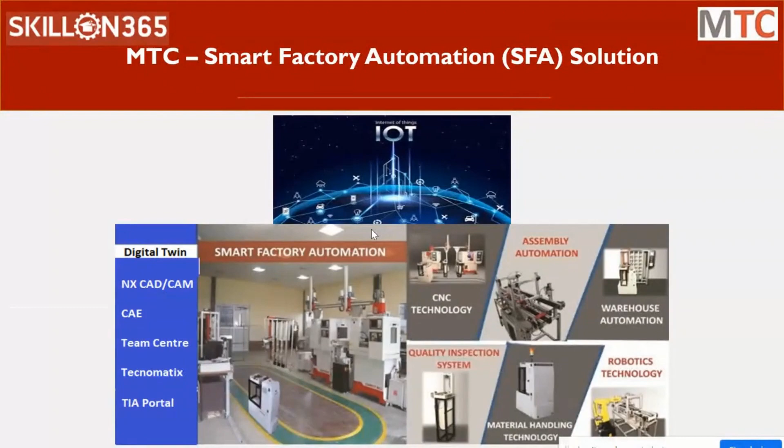I'll start with a video of a basic understanding on this smart factory. As I was explaining, this is an automated factory where a particular engineer sits at a computer, programs it completely in software, and that is done automatically.

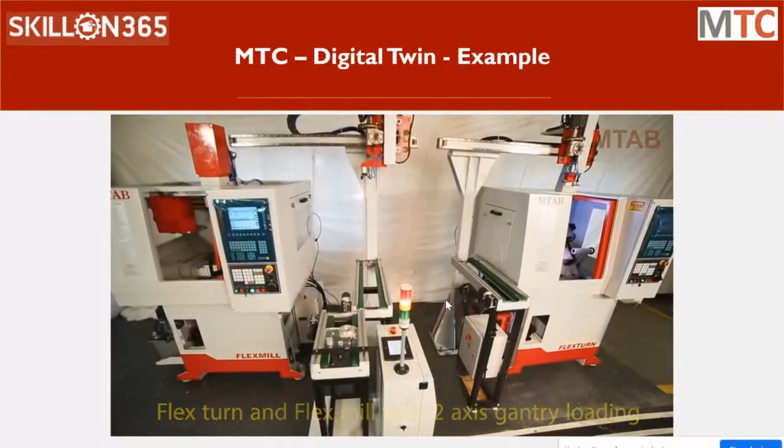When I say programming, he defines the infrastructure of the factory - what components and equipment are available, what the individual processes are, and what the sequence of operations is. Once he defines all that, the complete operation is done automatically in a sequential manner.

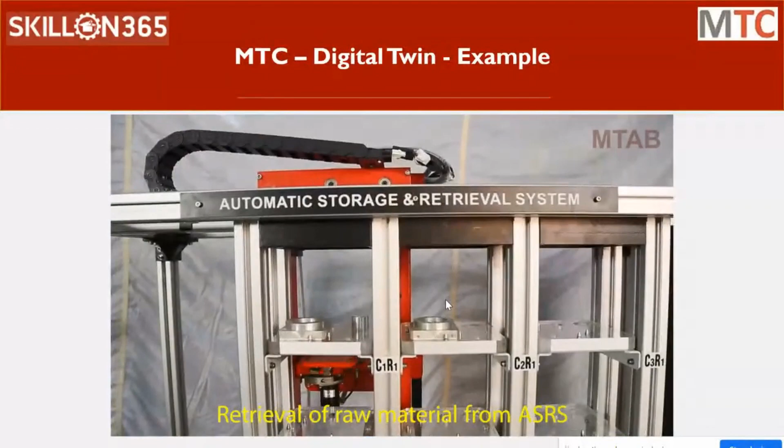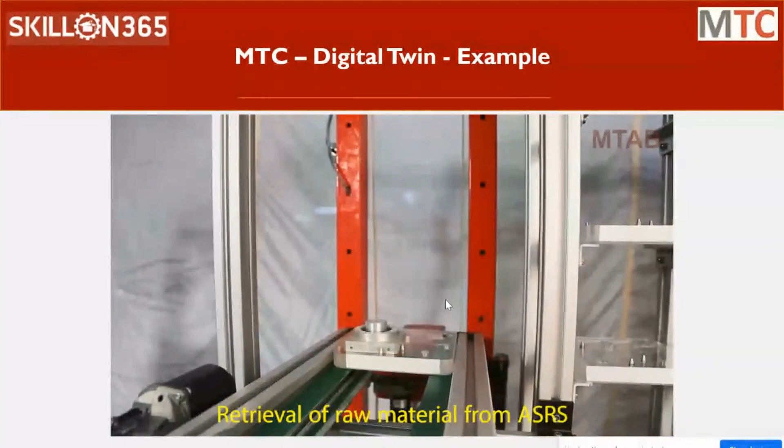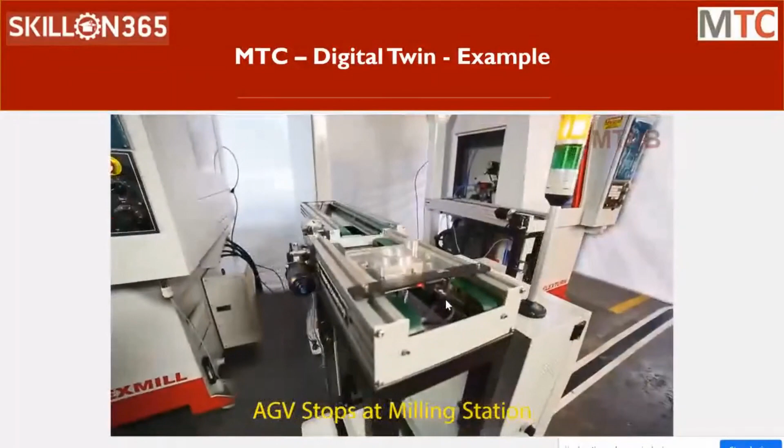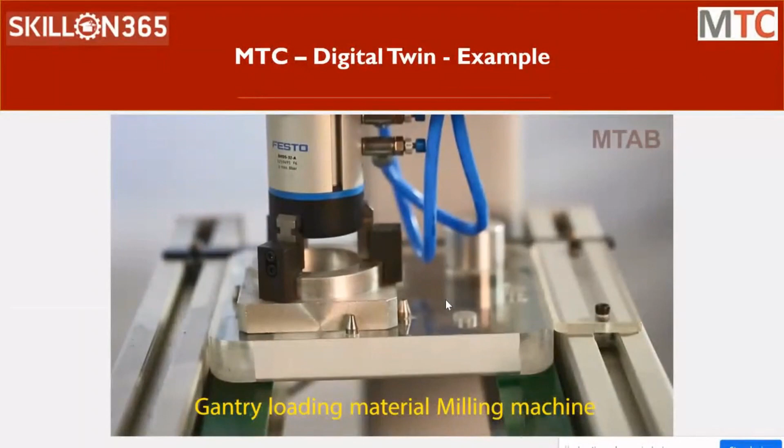Let's take a typical manufacturing sector. The basic infrastructure available includes a storage space where raw material or finished goods are stored - the stores. Then there's a manufacturing space where machining or production of components happens. Then there's an assembly area where things get assembled - the product from the production line gets assembled. Then there's a quality test area where products are tested, and finally it gets stored. This is the normal process and infrastructure involved in a manufacturing industry.

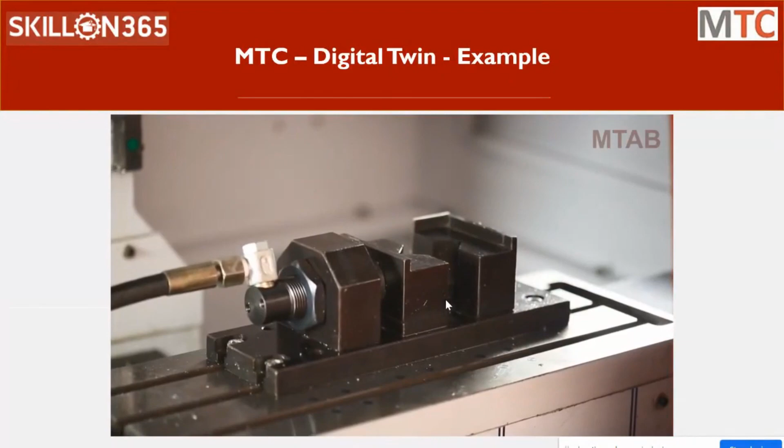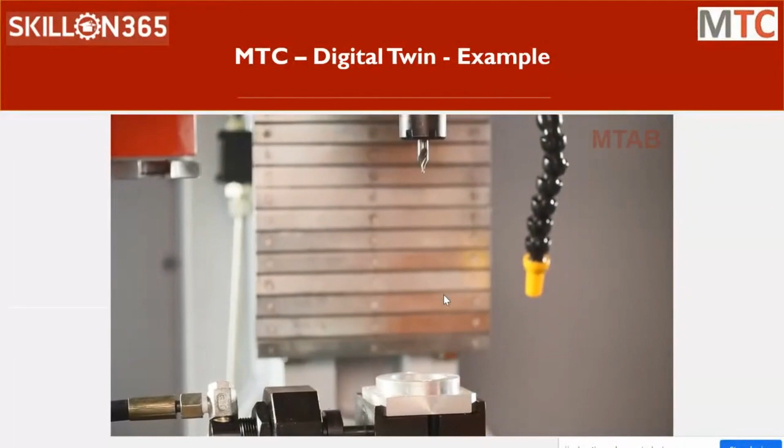So here we have a similar model. We have an automatic storage and retrieval system, where raw materials or finished goods are stored - it is an automatic warehousing, and we can program it to store the raw materials accordingly. There is an automated guided vehicle which transports the material to individual stations, so transportation and logistics are automated here.

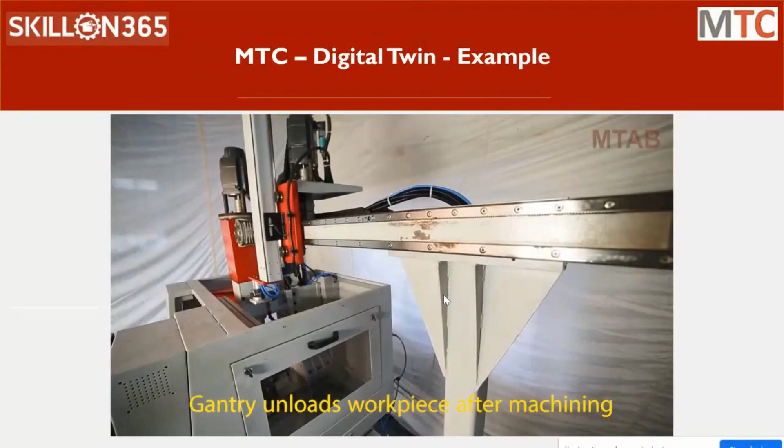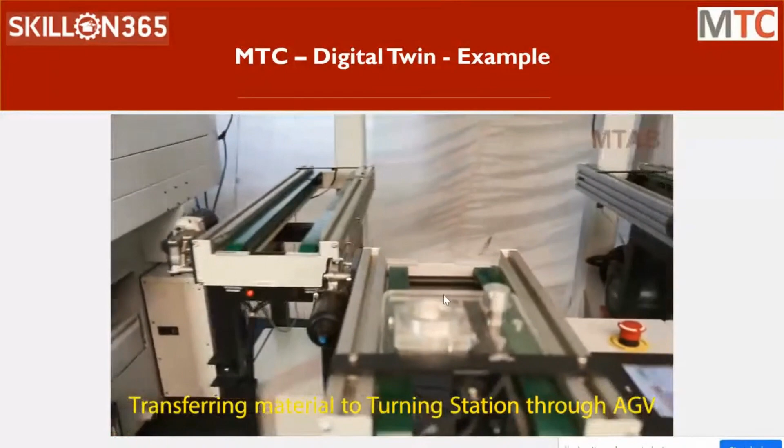In the production line we have CNC machines - a lathe and a VMC, used to manufacture the components. Here we are trying to simulate an example of a bearing and shaft assembly. There is a shaft which gets machined in the VMC, and a lock which gets machined in the lathe machine, and the bearing gets assembled on the shaft and gets locked. This is the process you're seeing in this video.

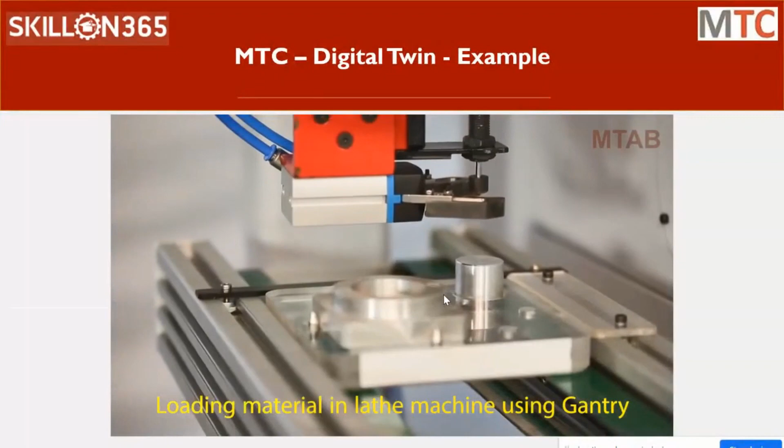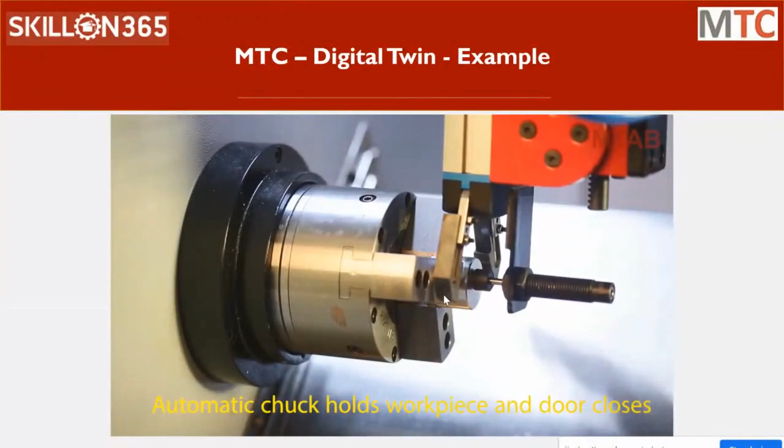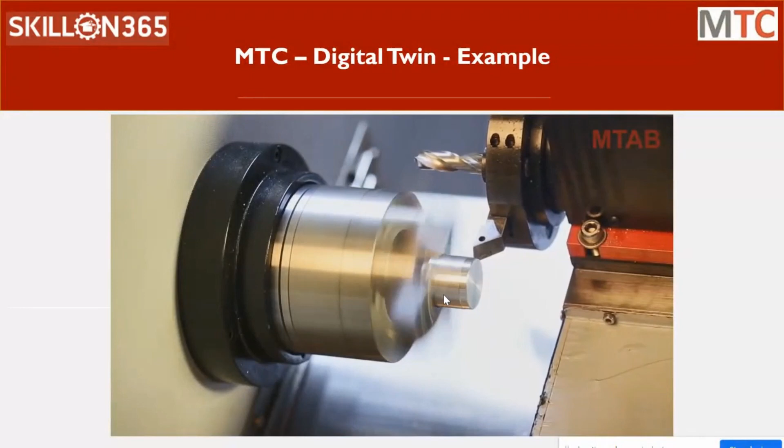First the job gets machined in the VMC, then the lock in the lathe machine. As explained, this is a completely automated setup - this production line is automated for loading and unloading using a gantry robot. The job is automatically picked up from the belt conveyor, loaded into the CNC machine, and machining starts automatically. Once machining is done, it picks up the job from the chuck and places it back into the conveyor.

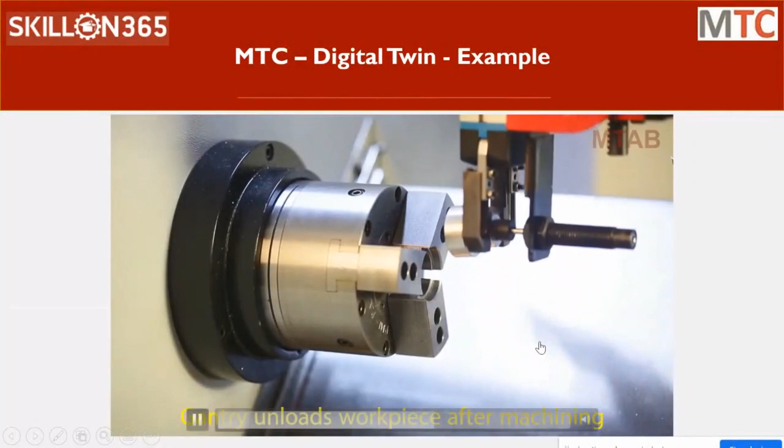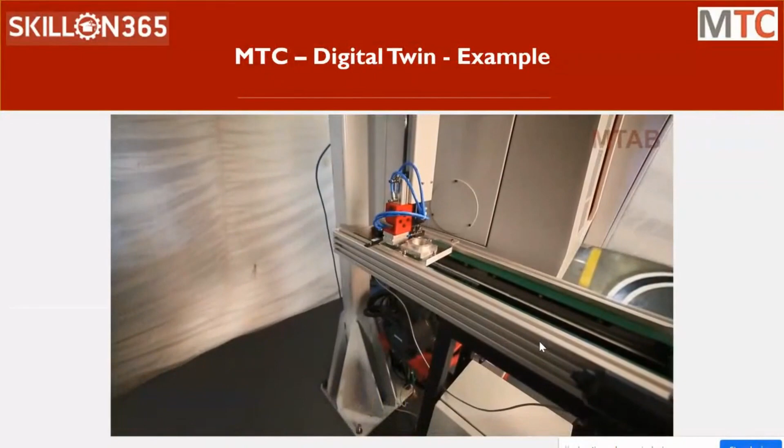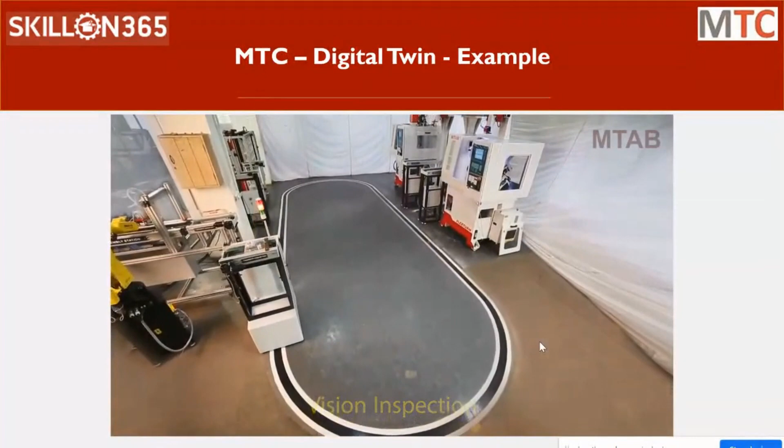So now the production is done. Then it goes to the next station, which is the assembly station, again using the automated guided vehicle. So whatever components are machined right now, the shaft and the lock, get assembled with the bearing to complete the product.

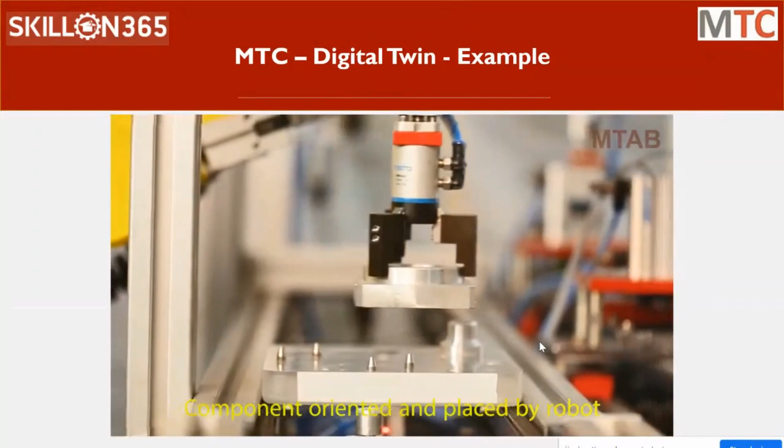This is a mechatronic based assembly station with robots, made more modular. The first step is the assembly of the bearing. You could see that in the video. Bearing got assembled.

Now the lock will get assembled.

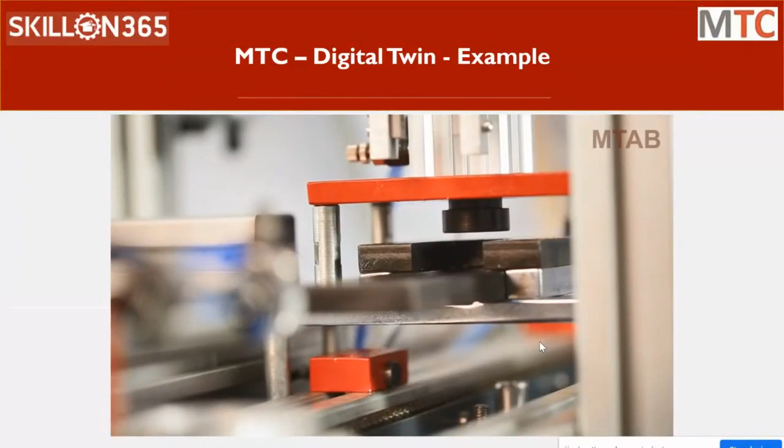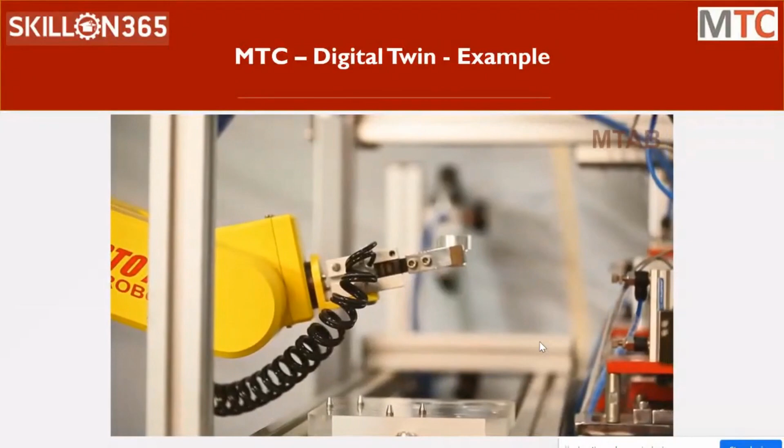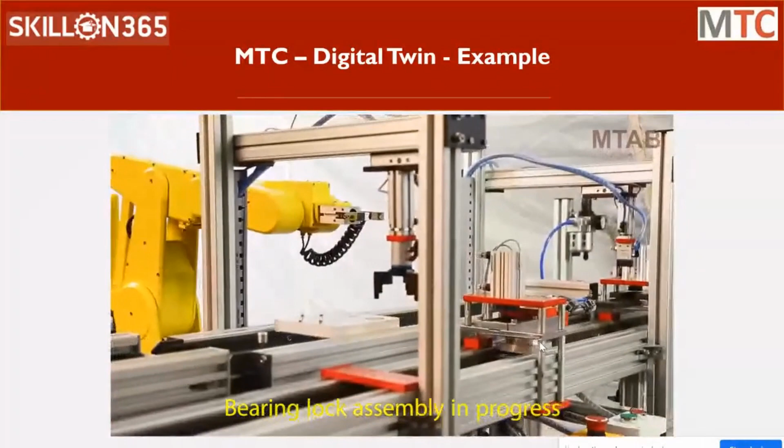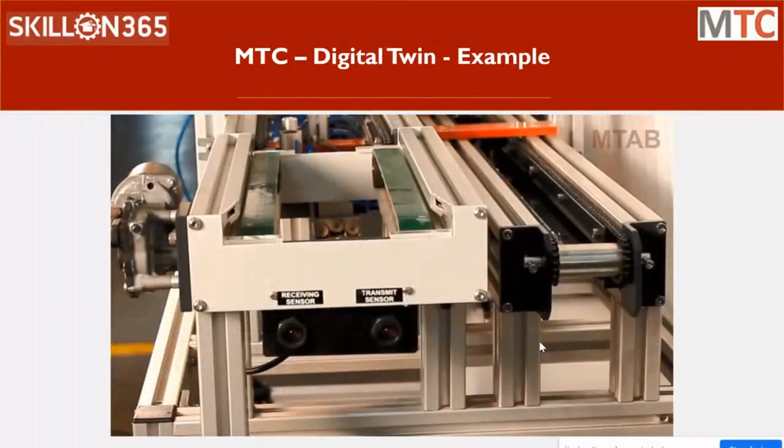In a typical manufacturing industry, as I was explaining earlier, the supervisor or manager defines the infrastructure, defines the process of individual stations, and defines the sequence of flow of information to automate the process, or even if manual, how it goes through each station and how the assembly is completely done. Right now you could see the product is completely assembled and then it goes to the next station. So the process they write covers everything from picking up raw material till quality testing is done, and then placing it back into storage. That is the complete work a manager does.

Similarly, they are going to do that in the software in an automated way.

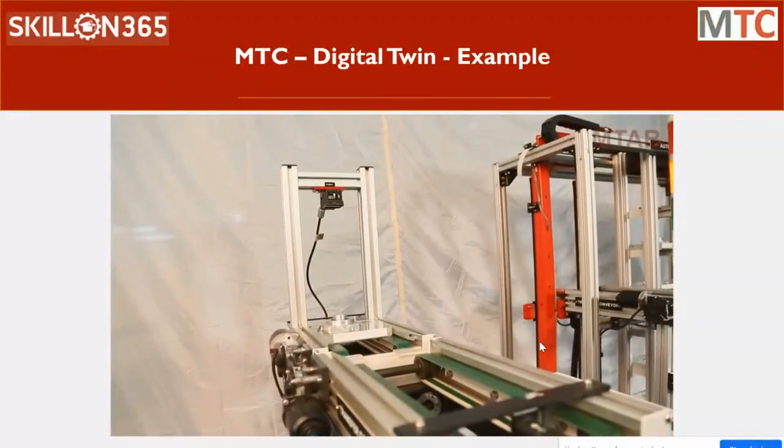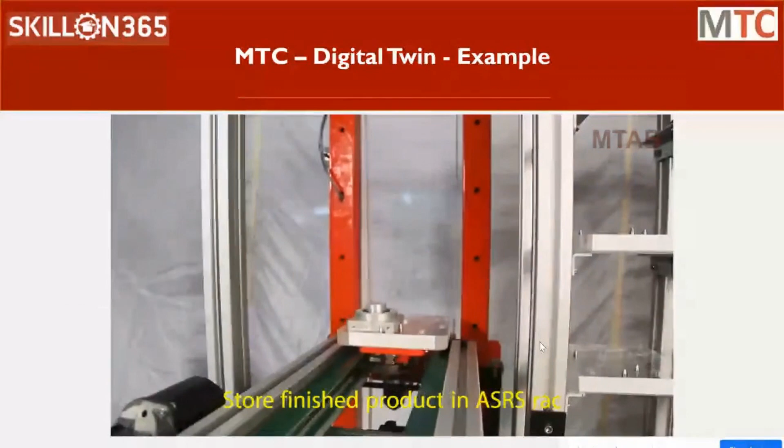This is a vision inspection station using image processing technology with a vision camera. We examine the job which is assembled, and using stored parameters, it gives a result on whether it is accepted or rejected, and the job is stored accordingly. We can program it so that if rejected, it goes for remachining or rework, or to the rejected bin, however we want.

So this is a typical example of a manufacturing industry. It will vary if it's a process industry, where the process would be different, maybe without any CNC machine, with other processing work done according to the job or product. So this is the complete automated factory, and on top of this is where digitalization sits in. We're going to see digitalization in a later part.

In the smart factory, I'd like to cover some information I faced earlier. I've been conducting this webinar for quite some time with many institutes, and I get questions from students and faculty about whether automation is going to completely eradicate humans or take away their jobs, or what automation's actual role is in industry.

We're talking about a nuclear industry where a lot of nuclear-related jobs are done, with restricted usage of humans or limited ways of working in those environments. Take chemical industries, or glass or rubber industries, where the process has to be very strict and tidy so they don't face accidents that could cause injuries. You would have heard some recent news in Visakhapatnam as well, right? So those things can be avoided.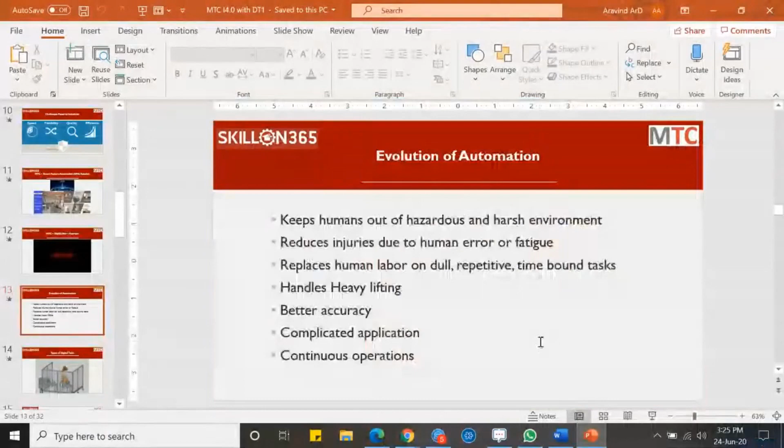I'd like to show you an example using my product. This is our online e-learning product, SkillOn365, where industry cases or industry skills we've gained as knowledge have been made into content online for learning. We have one course on robotics basics that tells you the different applications of robotics industry is looking at today. These are broad areas, and according to our intelligence and ideas we can explore much more opportunities available.

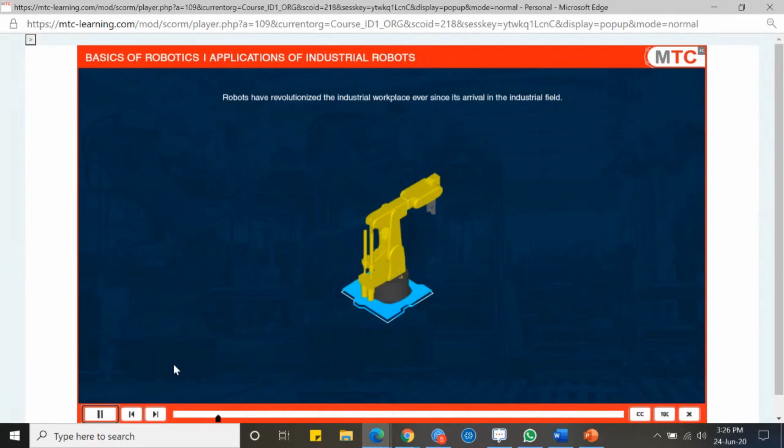Robots have revolutionized the industrial workplace ever since its arrival in the industrial field. According to ABB Robotics Analysis of Statistics from the International Federation of Robotics, most robots do very specific tasks and fall into 10 categories. They are arc welding or robot welding that joins metal surfaces.

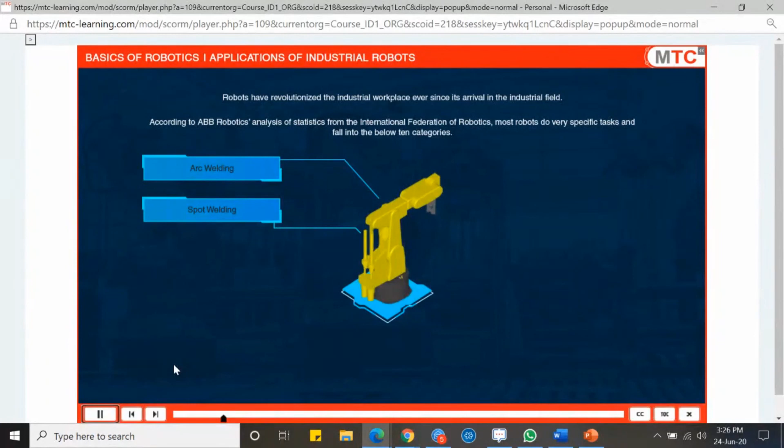This improves the safety of workers by avoiding arc burn and inhaling hazardous fumes. Spot welding, where two contacting metal surfaces are joined by directing a large current through a spot of an automotive piece. Materials handling, where robots are utilized to move, pack, and select products. Machine tending, used for loading and unloading raw materials into machinery for processing.

Robots are used to paint automotive body parts. Robotic picking and packaging, which increases speed and accuracy.

Hello, Mr. Arvind. Please be louder. The audio is not clear. Yes, madam.

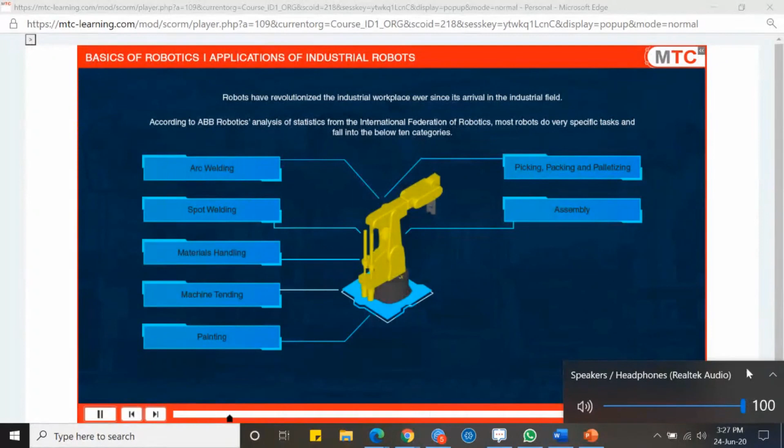Robots are also used in the finishing process after processing machinery, such as mechanical cutting, grinding, deburring, and polishing. They're also used in glue, adhesive sealing, and spraying materials, such as windscreen and door sealing assembly. Other processes where robots are used include inspection, water jet cutting, and soldering.

Click or press each tab. These are some of the broad areas of robotics applications that it has evolved into. But as I mentioned, under these there are a lot of other application categories that might come out - it depends on our innovativeness.

For example, a few days back I saw a video from some European countries where robotics is used in agriculture for plucking fruits. What they did is fit a vision inspection camera in the robot as an end effector along with a gripper. The vision inspection checks whether the fruit is ripened or not, and then the gripper picks the fruit. The kind of work being done today is massive.

Similarly, in the welding sector, we recently worked out a solution for arc welding. One customer does a lot of welding work for building body parts for trucks or buses. If you buy a truck from Tata or Ashok Leyland, you get only the chassis, and then the body or cabinet is built separately by other companies. They do this work but aren't getting manual welders, so they wanted automatic robotic welding. We did a complete case study and gave them a solution called laser seam tracking welding.

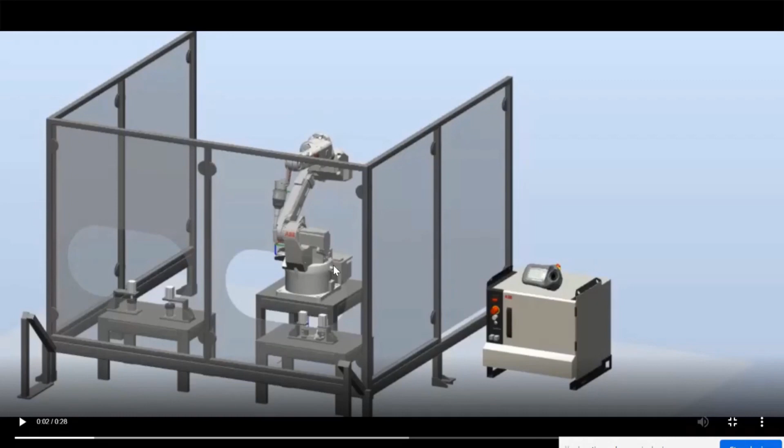Say for example, this is a robotic cell. This is an arc welding cell. You could see the video first, what it is doing. When I press start, the robot moves to the job. It does the welding automatically. The welding is started, it is continuous, and the robot is also moving continuously on the job.

So there is a simultaneous function happening over here, and once it is done, it retracts to its home position. Here, the robot is a separate device and the weld gun is a separate device. They are just interfaced, because when you order a robot, it doesn't come along with the gun. It is always the end effector — this is the end effector, the gun we see here.

Like this, we can put in different types of end effectors — it could be drilling, painting, a spray gun for painting. We can put whichever is required for our application. So here it has to sync with the robot. The third party equipment, whatever we fit in, has to sync with that equipment.

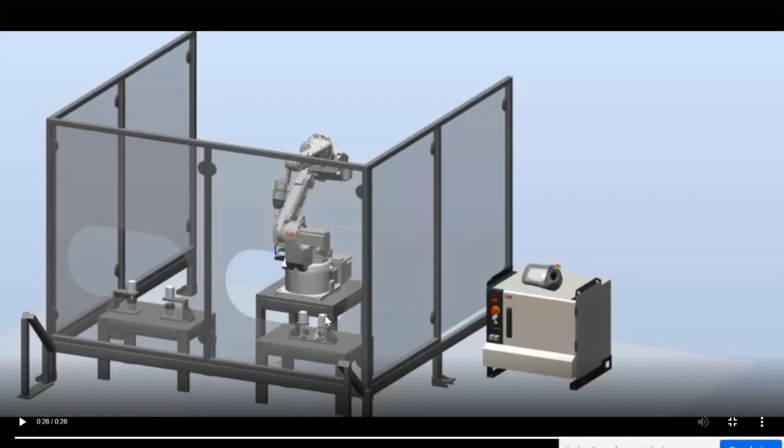There are a lot of fixtures available here where the jobs are clamped, where the welding has to be done. So why we are urging that you learn the technology via the application is that you could see the way the course is built — that will give you the idea why.

First is to understand what is this workstation, this work environment. The robot has to understand what are the things surrounding it — like there is a gun, a fixture, a cell, sensors. And it is an automated one, so they have to talk to each other and perform this job in a very sequential way without any accident. So first we have to understand the entire work cell.

Then we have to do the interfacing. The second is about configuring the controller. As I mentioned, the third party equipment which you fit has to communicate with the robot, and they both have to work in synergy, in sync. Only then is the job outcome produced. If not, the outcome is not there.

Then I might be doing it again manually — I might have multiple buttons, press one button for the robot to move to one position, press another button to start the welding. So the idea of automation is totally diluted there, and that doesn't work. So the second step is configuring the control systems.

The third is about creating the tool center point. Let's see what that is — I just want to get into that chapter a little deeper so you understand what we are talking about, because only then does the programming come in. Programming is only a part of the application. First we have to understand, because when we write the program, we will be calling the welding gun to come and do the welding.

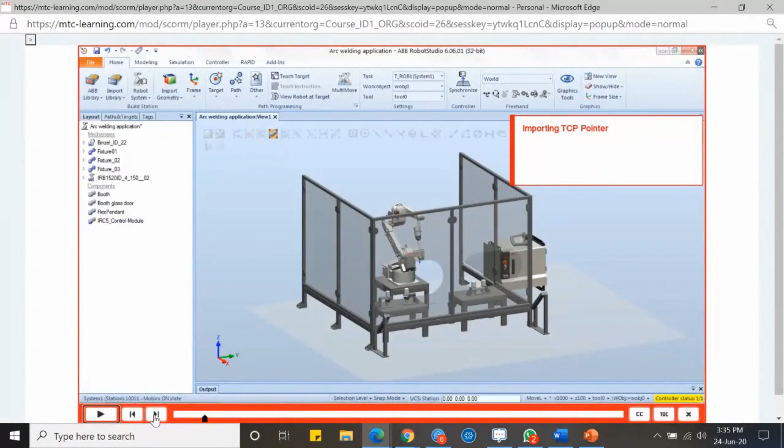So let's now learn how to import a TCP pointer. This course will teach you how to set the TCP pointer for this robot. By default, the TCP pointer of a robot will be at the center of the robot.

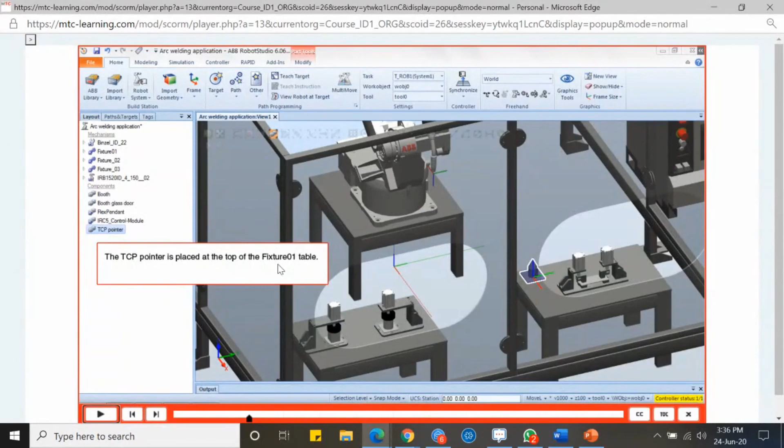Then we have to position it on the fixture table. For that, we have to enter the coordinates and then place it on the set fixture table, the TCP. Then we have to match the tool end tip with the TCP tip, and enter the values as a tool center point for the robot. Then the robot will understand where the job is and where we have to machine it.

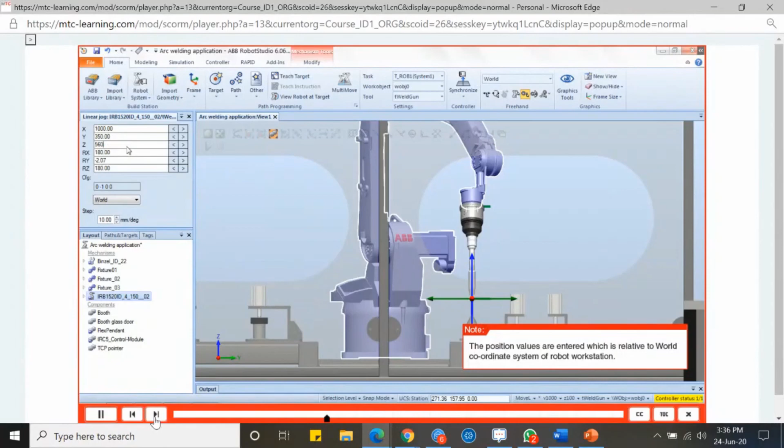Then we have to move the robot, jog the robot, and place it on the right tip, click of the gun, enter and type the value. Double click in the Z coordinate field. Type the value 560 mm and press enter on your keyboard. Note that the position values entered are relative to the world coordinate system of the robot workstation. Close the page and zoom in to view the robot TCP closely.

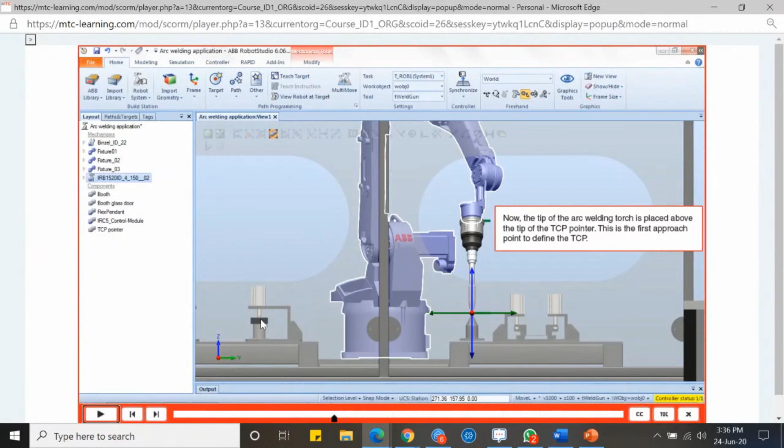Now the tip of the arc welding torch is placed above the tip of the TCP pointer. This is the first approach point to define the TCP. Then, if you want to do the welding in this fixture, we have to set it separately over here. Then the welding has to be started. Then you write the program, and when you write the program in the robotic controller, it will understand where the job has to be done and what welding has to be done.

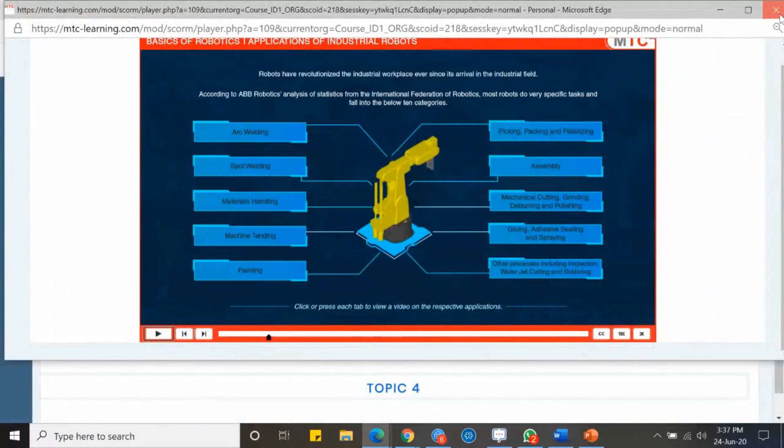So the idea behind teaching robotics or any automation in the application way, I hope you've got this point now. Once I'm done with this course, I'll know how to do this for different applications, like painting, drilling, boring, whatever we just saw. Similarly, I myself in my company, and a few other people in my company, give a lot of automation consultancy to various industries today. They give automation solutions to them. That's how we learn the application, because we need to know various ideas and technologies, then how the robot can be interfaced with that, and give an overall solution to the customer.

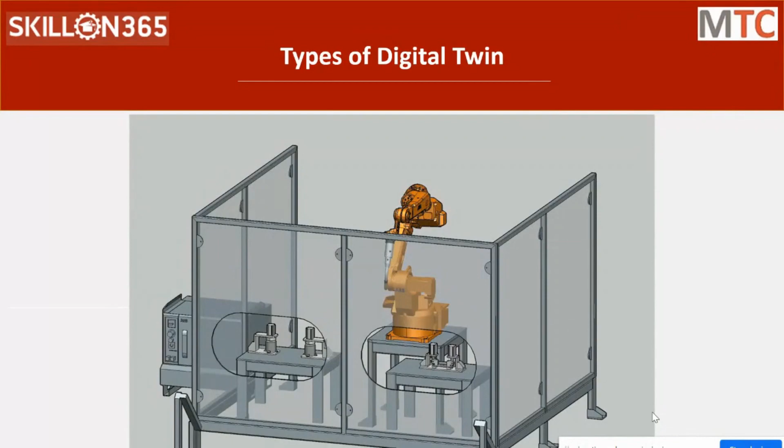So till now, what we saw is the smart factory part. We saw the automated factory, robotics, how it influences, and all those things. Now, on top of it, as I mentioned earlier, the digital twin or digitalization sits. So we're going to see what this digital twin or digitalization that we are talking about is.

So digital twin is actually a virtual representation of, it could be a physical product or it could be a process. I'm representing that into a virtual environment to understand its behavior, predict its behavior, functionality, characteristics, and all those things. And if I have to change a few things to get an optimized outcome, I can do all those in the virtual environment. That is called digital twin.

Let's take an example, a case study, to get more clarity on this. I work for this under my digital factory product line. We got a call from one of the industries in Noida who manufactures a lot of automatic warehousing systems for e-commerce websites like Flipkart, Amazon, Tata Cliq, and all.

So they set up the automated warehousing system. You would have seen this kind of videos on Discovery, and even on YouTube you can see how an Amazon warehousing factory is automated. So they manufacture a similar such setup.

So they got an order from one of these companies, and their delivery time is actually 12 to 15 months. See, these are not standard products that they can manufacture and keep ready to deliver immediately as and when they get the order. No, because these are unique. The customer will define what is the size of the warehouse, what is the size of the pallet, what is the size of the individual pallet holder where they have to keep the job. Accordingly, the warehouse has to be built.

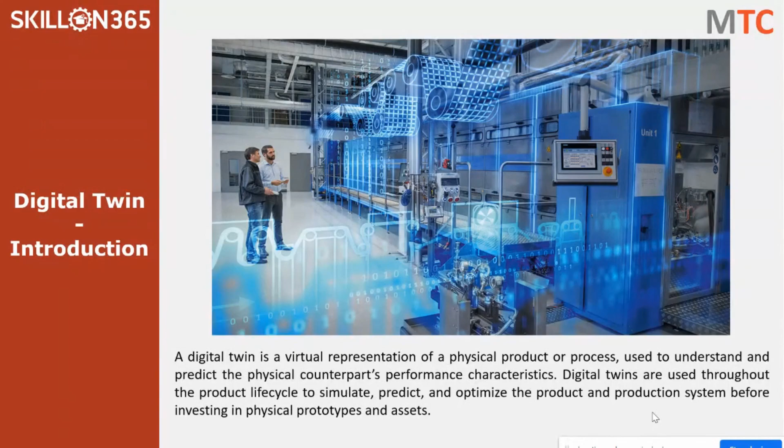What is a digital twin? When we do the design - digital twin has got two parts. One is the design part. Once you do all the CAD layout and all the CAD designs, we apply kinematics to it. Whatever physical properties you mention, like the dimension, the weight, the type of material - all those things - and then we apply the kinematics.

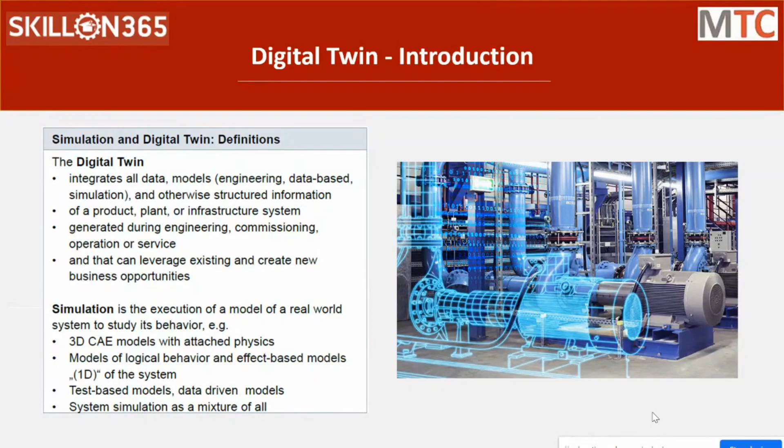Kinematics means if there is movement - if it is moving, whether it's a rotary movement or linear movement, how is it functioning. So those kinematics are also applied, and it is completely tested in the virtual environment before even getting into manufacturing. I test its behavior in the software itself, apply all those conditions - environmental, type, process conditions - everything, and see how it's behaving. In our terms, we call it virtual commissioning.

Once I complete the CAD layout, I import it into an environment where I assemble it virtually. And if there is a fit issue, or an assembly issue where the dimension has to be changed, I can simply change it in the software - it's only a soft virtual one. I can immediately go change the design and again see if it is fitting properly, and whether I can screw it properly, all those things.

Then I can connect it to the controller. I'm already applying the kinematics there. Then now I can connect to a controller - it could be a PLC, an HMI, a SCADA, a CNC, or a VFD, whatever it is.

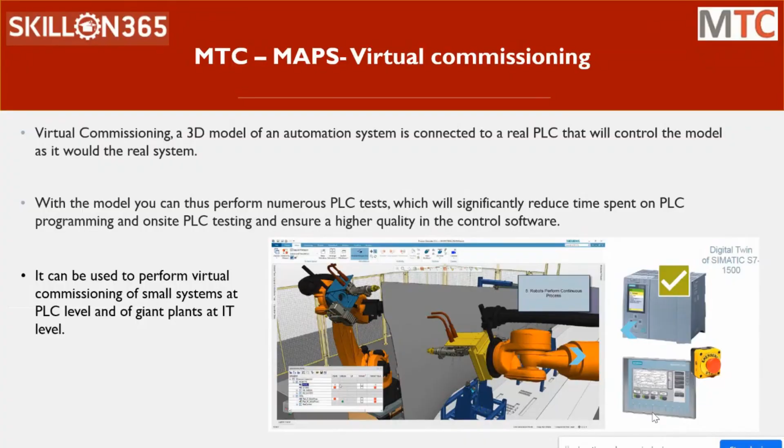And then I give an input from there, and I see how it is reacting and behaving. And if there is any problem, then we can rectify the issues there, and then we are making the product more optimized before even getting into production or implementation of it. So let's take a simple example.

We do a lot of testing in our product as well. This is testing our ASRS, or automatic storage and retrieval system. So this is one kind of testing that we do. This is the ASRS pallet testing. This is an ASRS where this is a pallet conveyor, and these are the number of pallets. We have 18 pallets in there.

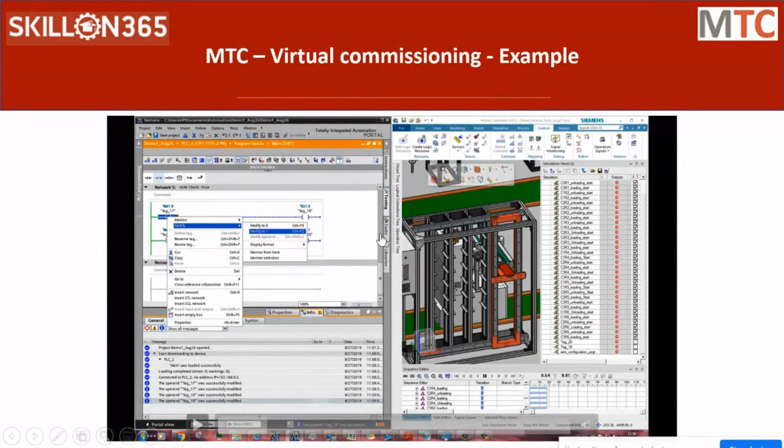We are just trying to test whether it is moving to the right pallet when I program it, because this is connected to the PLC. The input is from a PLC. This is controlled by a PLC. Sometimes errors could happen or an accident could happen even when a program is wrong. So we can also validate our PLC program, whether we have the right program or not. So what we did, we input all the parameters here, the position of every pallet, tag that with the PLC, and give the input from the PLC and see if it is moving to the correct position or not.

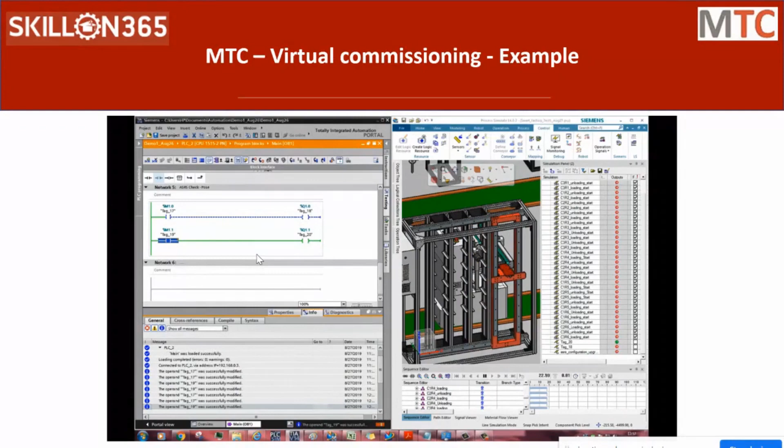So say I'm switching on position number one. Is it moving to position number one? And when I say go retract, whether it is retracting to the home position or not. So these are some of the testings that I do and ensure that the product is fine. And then I go for manufacturing or implementation.

Now this digital twin has got three major modules in it. First one is a product digital twin or product digitalization. Second one is production digitalization or a production digital twin, and then the performance digitalization. These are the three major modules of the digital twin. They are all interconnected. It is a sequential way. First the product, then the production, then the performance. And there is a continuous feedback in the reverse way.

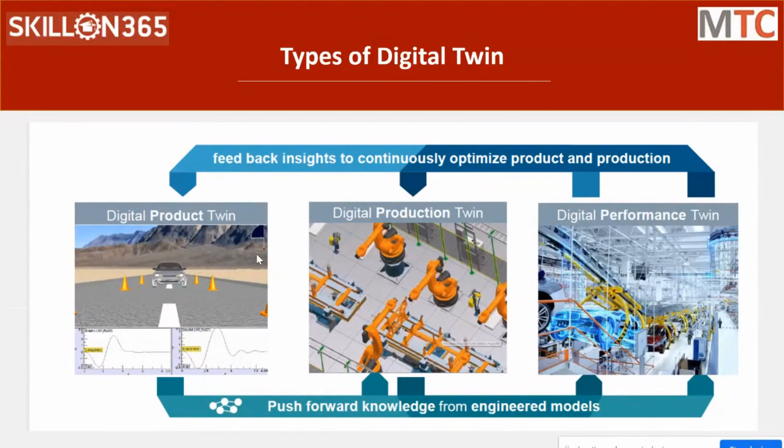So from the performance there will be a feedback to the production, and from the performance we can also give the feedback to the digital twin as well. Thereby, because when I mentioned digital twin or digitalization, we are saying that it is a predicted value. So with the predicted value, after we implement it, we will have the performance analysis of it, which is live, active, actual values that will be given as an input back to the digital twin and ensure that it is getting optimized much better.

Okay, so first let's see what is a product digital twin. Let's take an example of that Hyundai Creta car, which I mentioned earlier. We were talking about speed to market. Speed to market, first point is speed in design and speed in mainly getting the product design and optimized faster. That is a product digital twin.

So whatever product that we design, we do all the testing in the software or the virtual environment. We get the product optimized. Whatever physical testing that we can do, we do it in the virtual environment, and we ensure that the physical product performs as per our desired results. And then we are now confident enough to get the product out in the market, and maybe after production we can do minimum testing, and then we can release it to the market, and thereby the product is actually much optimized.

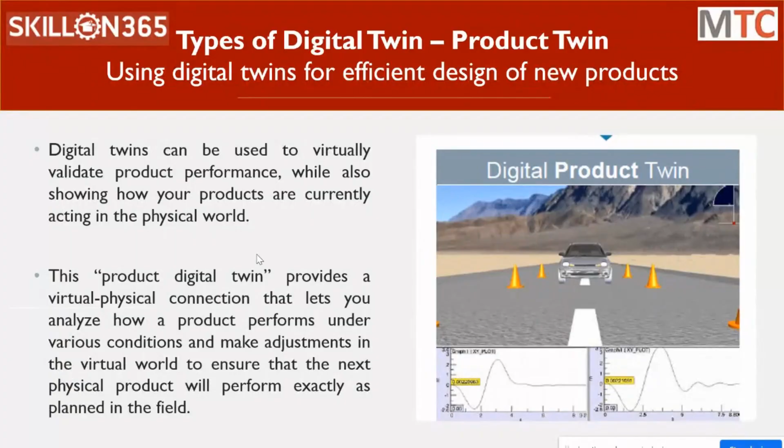This is an example. I would like to show an example on the product digital twin. The product digital twin, let's take an example of MTAB. We ourselves manufacture a lot of CNC machines. We did one of the five-axis machines to one of the customers recently, and we did a complete digital twin concept in that to make a fast delivery.

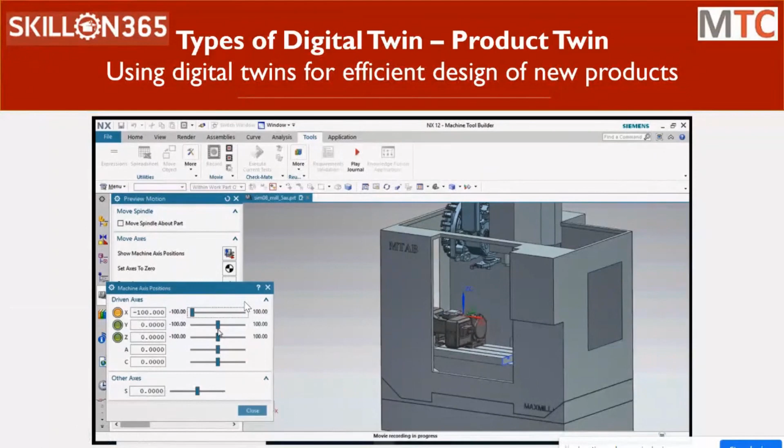So there is one called axis testing in our process. So we do the axis movement testing to ensure that when we move it, it doesn't hit the cabinet, and it doesn't cause any accident. At the same time, it is moving as per my design. For example, when I design the machine, I mentioned that x-axis has so and so travel, y-axis so and so travel, z-axis so and so travel.

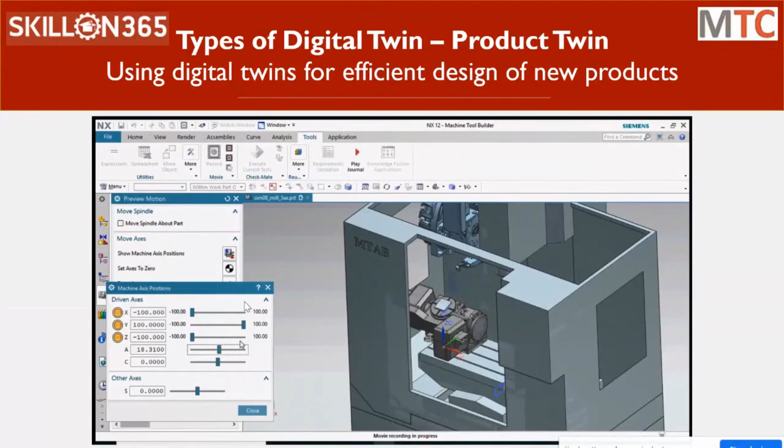This is especially important with a five-axis rotary table fit on top of the VMC table. When I move it, I check that the travel stays within limits, and make sure no accident happens. Because if this were done in the physical environment and there's an accident where it hits the cabinet, I'd have to scrap the cabinet and make a new one to fit in. The cost is high, and I'd have to wait for the new cabinet to do the testing again and check performance, so the time taken is also huge.

I'm rather trying to do all those things in the software itself, and I can also connect it to an actual controller and see if the machine is behaving properly or not. Different types of testing can be done for individual features or individual parts to make sure the product is optimized.

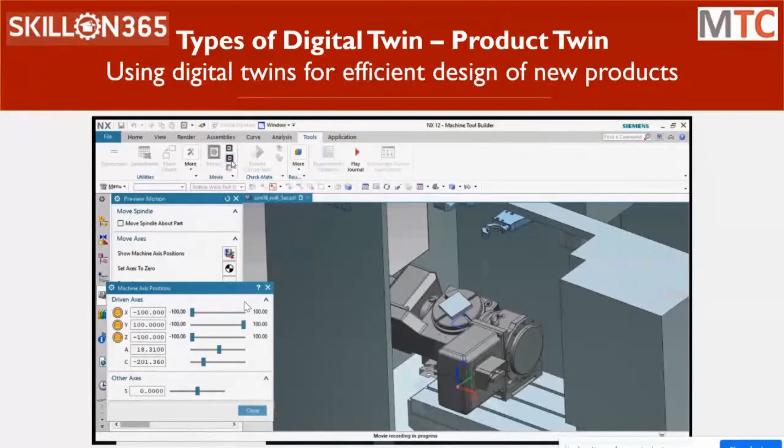Once I manufacture it, my product is designed and about to be delivered much faster compared to earlier without the digital twin concept. Now it's not just the product—as I mentioned, speed to market involves speed in research, speed in design, and everything. Also speed in manufacturing.

Once I've designed my product and I'm confident that its performance is fine, I have to optimize my production line. Once the product goes through the production line, if the production is also optimized and faster, the complete cycle is faster and the product reaches the market much faster. That's where production digital twin comes into play.

Production digital twin is where we do a complete digitalization of the production line and optimize it. We give all the if and else conditions and see how it's behaving, and how we can optimize it. Because another thing is that many people are not ready to actually test it out in the actual physical factory.

Let's take an example like the Hyundai factory in Chennai. If I am the engineer who has to optimize, and I go there and say give me the factory for one month, I will do a complete study and optimize it and give you the result. Imagine if the factory is producing 30 cars a day—30 into 30 days is 900 cars a month, roughly 5 lakhs is the cost of the car.

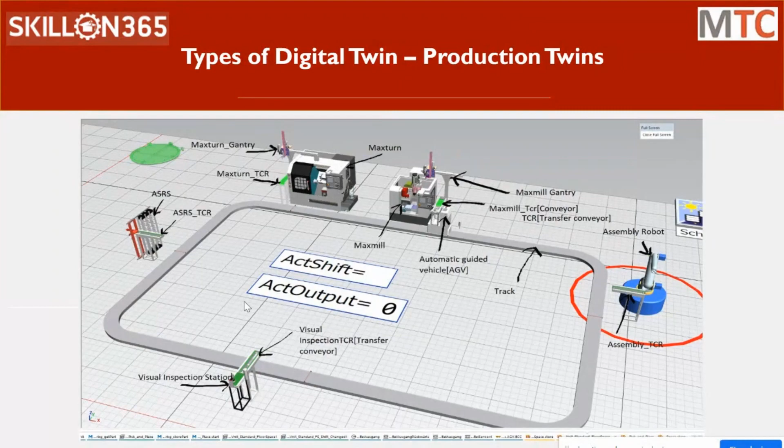A brownfield project is where we optimize the existing factory. We get the complete infrastructure into the software—what basic machines are available, machineries available, infrastructure available, what is the logistics, the movement of it, what is the sequence of operations, what is the cycle time taken by the individual machines. All that information is fed into the software and then tested out.

Let's see with an example—this is the smart factory with the video we saw in the beginning. I define the infrastructure here, like what machines are available, then apply the cycle time of the individual machines, what processes are involved in that individual machine, and what is the sequence flow of the complete setup—which station it has to stop at and what operation it has to perform there.

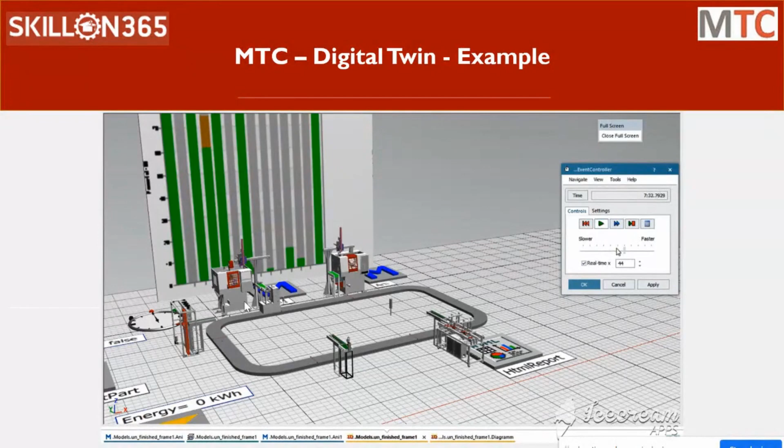It can also analyze the energy consumed by individual machines, the time taken by individual machines, and if I increase or decrease the speed, how the performance gets hit and what the output is. All these studies, all the if and else conditions I want to test, I put into the software, test it out, and then go for implementation.

If it's a new project, then we call it a greenfield project. So even before I go for implementation, I do the complete virtual design of it, even the entire factory, giving all the constraints in terms of energy, space, and resources.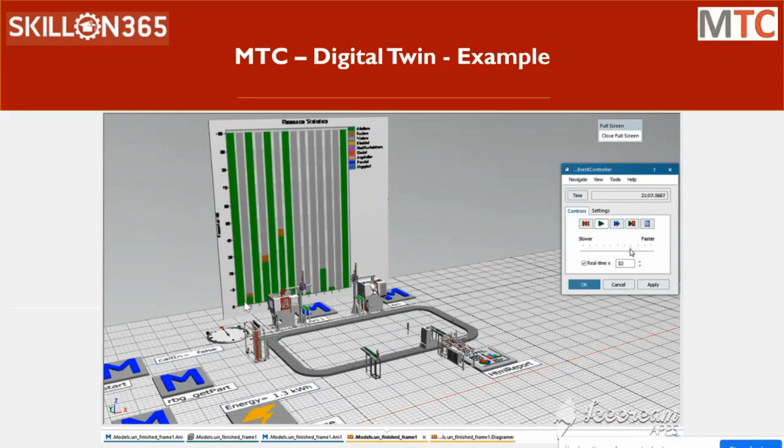And then process, and then see its output, and if I have to optimize, I can optimize. Say if it's an industry where I have to manufacture 30 cars a day, we do that top-down approach. So then I define what infrastructure is required, what process it should involve.

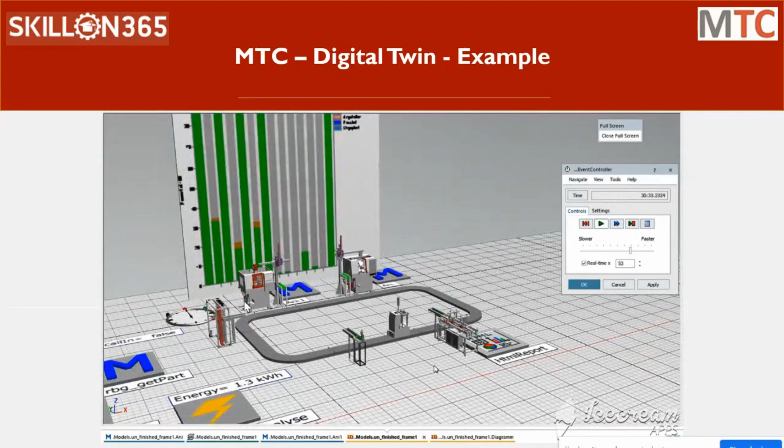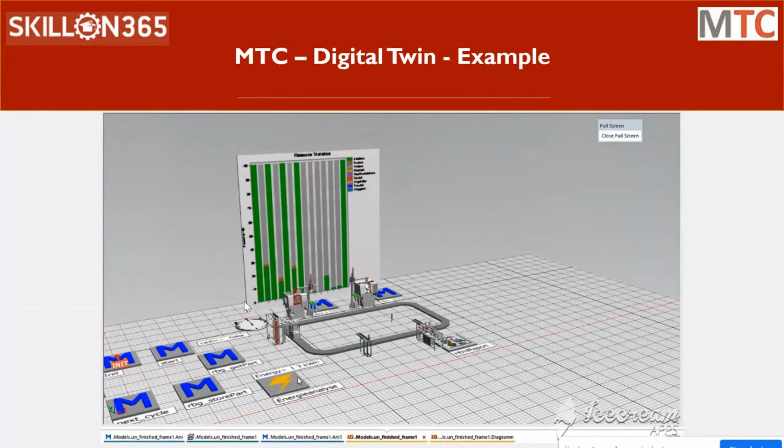How fast it has to run, and if they have to increase infrastructure, all those modifications can be done later. Once I do this analysis and complete all those things, it will give me the complete data, like what is the outcome, what kind of energy and time it has consumed, and what machineries are available. All that data will be with me, and if it's a brownfield project, an existing factory, I can go phase-wise optimizing things.

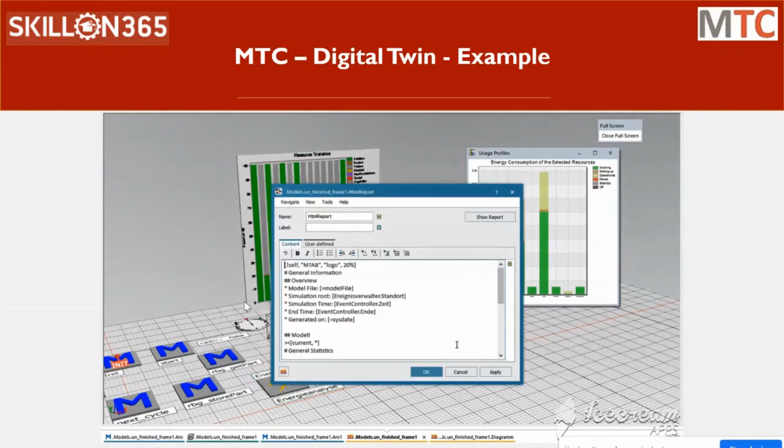Or if it's a greenfield project, I have the data with me right now, I can just straight away go and implement it. So that is the idea behind optimizing the factory, and this is the production digital twin.

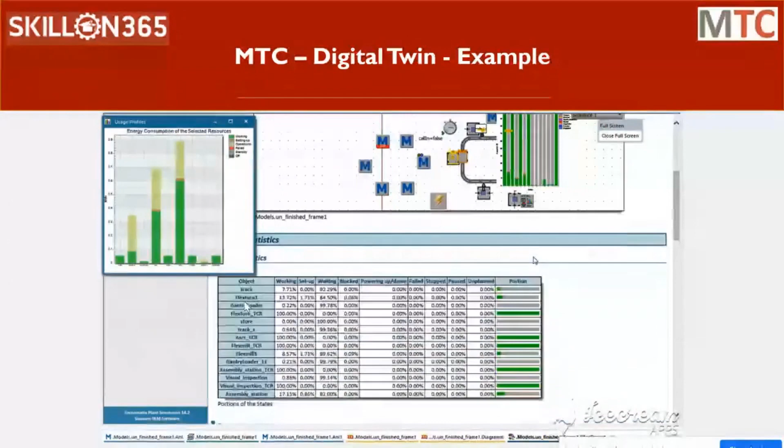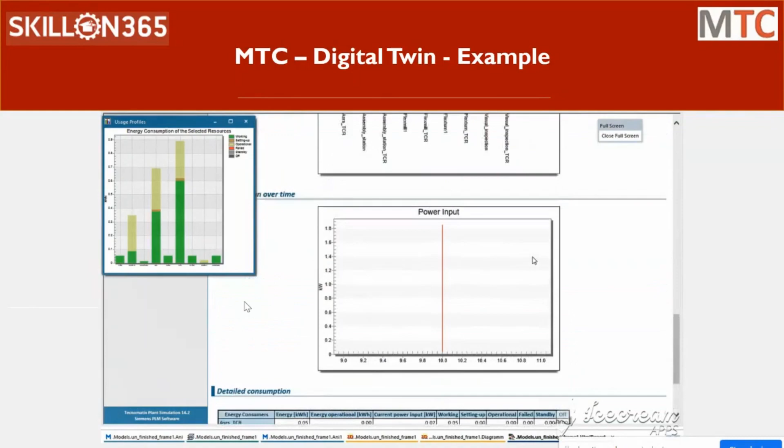You could see how the data comes out on the optimization of the factory, and using that we can go ahead and implement the optimization.

Now, till now what we saw in digitalization is product digitalization and production digitalization, right? Product and production digital twin. Those are predicted values, as I mentioned, we are trying to predict the behavior of the product and the production line.

So here the third phase is the performance digital twin, where the major part of IoT or Industry 4.0 comes in. That is one of the major sectors of Industry 4.0.

What is this IoT? We're not going to look deep individually into what this IoT technology is. We're going to cover how this IoT actually plays a vital role in Industry 4.0, because Industry 4.0 IoT is not a concept related only to computer science students.

No, as I mentioned, we have to see where IoT is actually applied nowadays. It's in the manufacturing area, applied in industry, majorly in industries where consumption is currently high.

So it's important for individuals across all departments to understand the basic knowledge of IoT, so that when they go to any IoT-based industry or any industry that has adopted IoT or Industry 4.0 technology, they will be aware of its functioning and working, and will have the skills and knowledge on top of it, which industry is looking at right now.

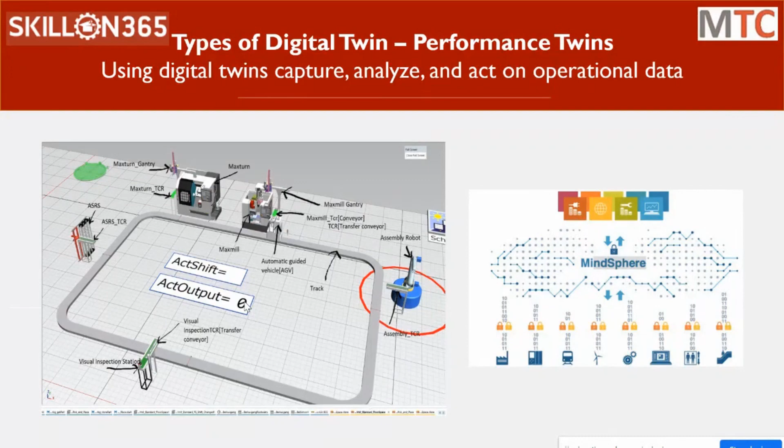So when IoT is introduced, the way it works is that it talks directly to the machine. It gives all the information possible for us to collect and analyze, and then do the performance analysis, whether of an individual product or the entire factory, doesn't matter. So thereby we can optimize both. That is the performance digital twin, and it has four main processes.

Connecting things is the idea of implementing IoT to talk directly to the machines. It should be a smart machine, IoT compatible. There are a lot of machines coming out with IoT compatibility, so that will not be an issue. Or we can add sensors to collect the information required from the machines. There will be a central controller which connects to different equipment or machinery in the factory, collects all the information, and pushes it to the cloud, to the internet. That is the first process.

Second process is data analytics. Whatever information has been received has to be analyzed and structured. There should be a structuring of the data. For example, in a factory there could be a maintenance engineer, or an owner, or a supervisor who might require different sets of information. It is not mandatory that we give all information to everybody.

For example, a maintenance engineer might need to know information like the oil level in a machine. The owner might not need that. The owner might require information like what is the total output of the machine or the factory today. So everybody is looking at different sets of information today.

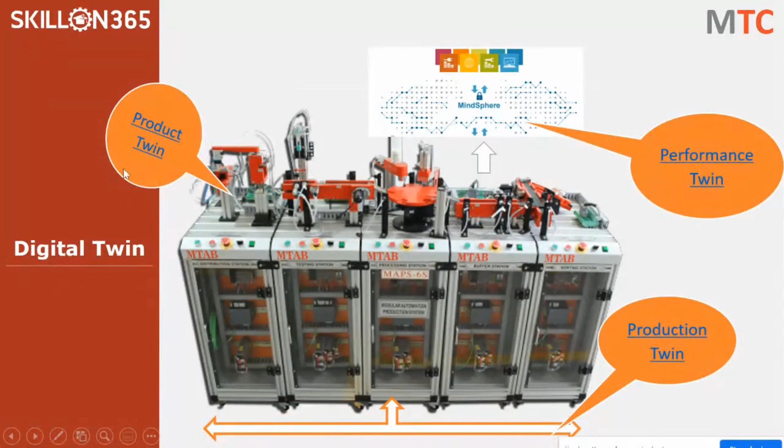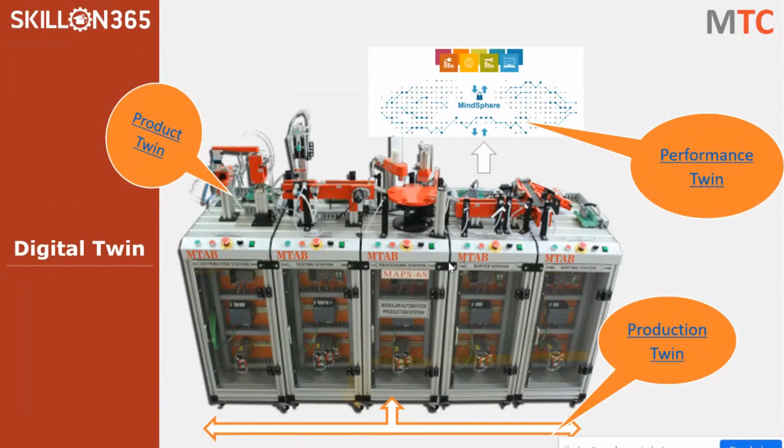So today what we studied is the complete automated factory. On top of it, the product digital twin sits in to analyze the individual product, and then the complete production digital twin sits in, where we analyze the complete production line, and then performance analysis sits in, where we analyze the performance. Then we have the actual data, and we give feedback back to the product digital twin or production digital twin to optimize more. So this is the summary.

By that, I have completed my session today.